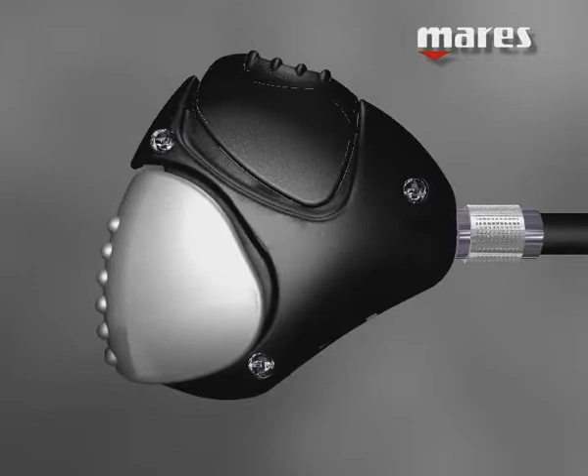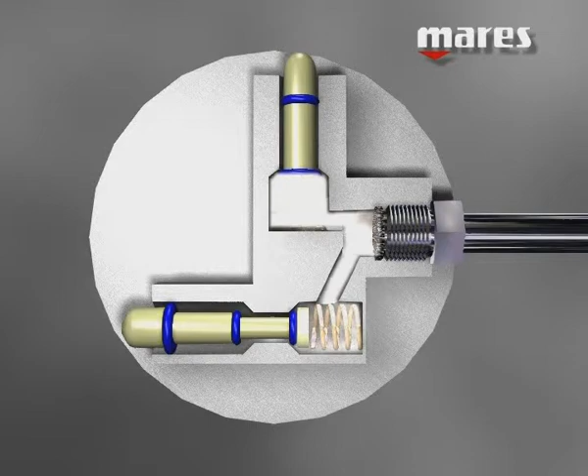Air arriving from the low-pressure hose enters the unit and is conveyed toward the command pistons. Pressing lightly on the inflation button pushes the internal piston, which moves to open the passage of air. The air is thus conveyed directly into the buoyancy bag of the BC, allowing it to inflate.

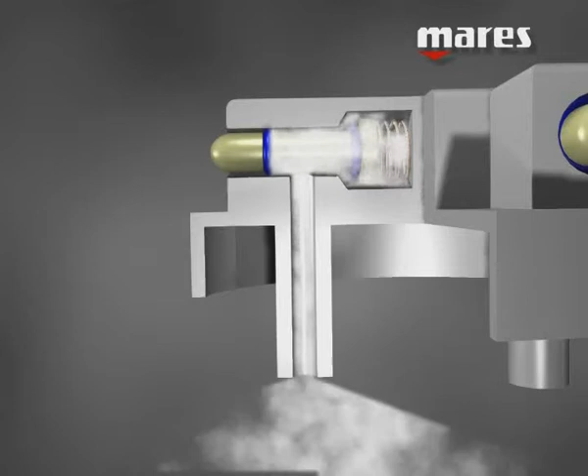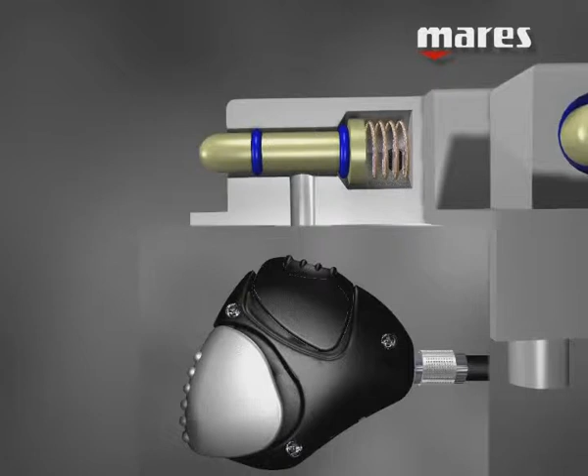As soon as the diver releases pressure on the inflation button, the piston returns to its original position, interrupting the flow of air and therefore inflation of the BC.

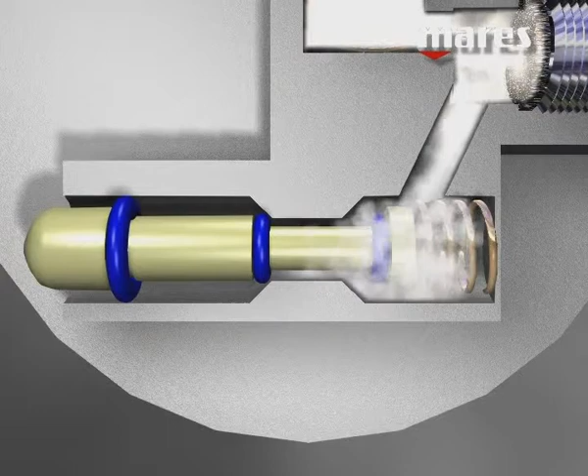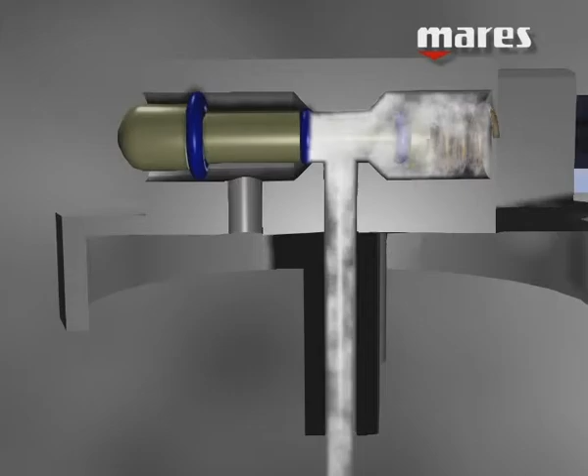Pressing the discharge button activates the corresponding internal piston, which conveys the air in the pneumatic circuit inside the BC. The pneumatic circuit includes the discharge valve.

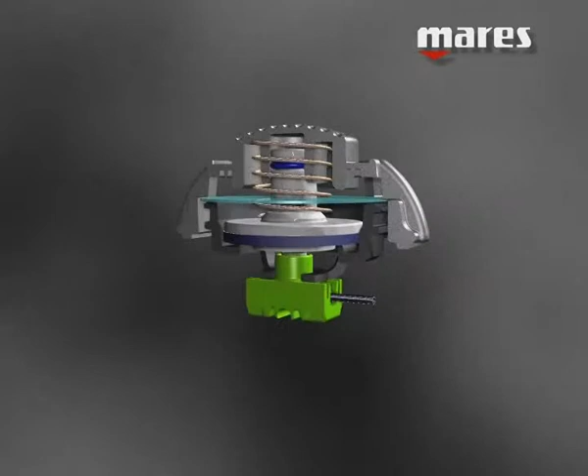When the air reaches the valve, it acts directly on the surface of the piston, creating a force sufficient to overcome the resistance of the opposing spring. The valve opens, and the air contained in the buoyancy bag can discharge, thus allowing the BC to deflate.

During this phase, the air passes through a discharge diaphragm. Once air release stops, the discharge diaphragm returns to position, preventing water from entering the bag.

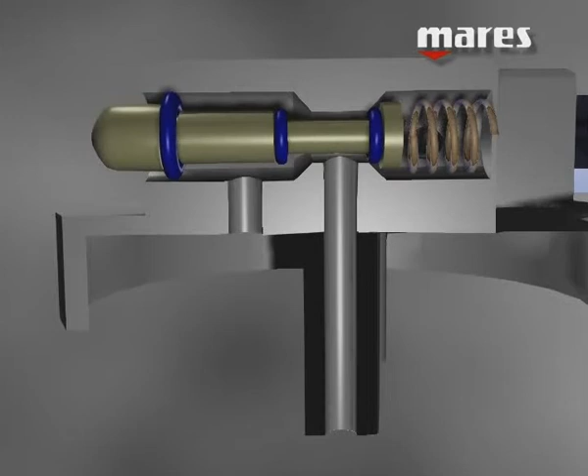By releasing pressure on the discharge button, the corresponding piston returns to its initial position, thus interrupting the flow of air. At the same time, a passageway opens that allows residual air in the pneumatic circuit to discharge inside the BC.

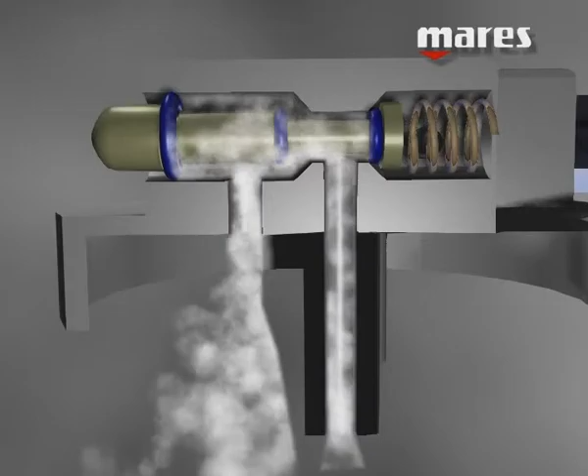This ingenious system allows the valve piston to return to its closed position.